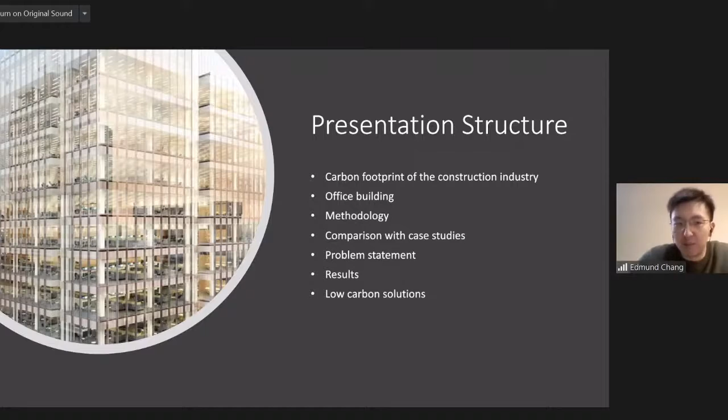As a summary, I'm going to share about the carbon footprint of the construction industry globally, in Scotland, and in the UK. I'll also explain my methodology, but not too in depth. I'll compare my results with other case studies and address the problem statement. Here's a solution I discovered in my project: by increasing the height of the building a little, we can save materials and reduce carbon footprint. But before telling you how I managed that, I'll give some insight into the current construction industry and how it affects the climate.

In Scotland alone, current measures to mitigate climate change include sourcing nationally made materials whenever possible, or even better, locally made materials. Production of steel using renewable energy and using cement substitutes are also essential, because cement production generates tons of carbon dioxide. There have also been talks to design buildings to last 100 years instead of the typical 60, which reduces the need to build. If we build nothing, there won't be any new construction adding to the carbon budget.

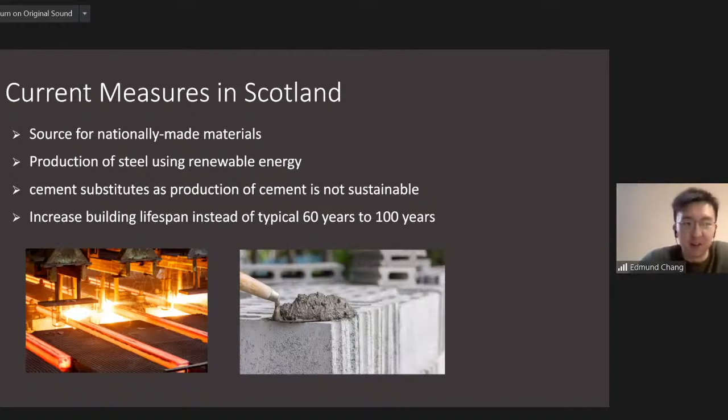In the UK alone, the construction industry is the single largest contributor of CO2, at 49% of total carbon emissions. There is urgency in decarbonization to limit the increase of global warming to only 1.5 degrees Celsius after 2050. If we do not enforce strict carbon laws, the world's average temperature is projected to soar to more than 3 degrees Celsius by 2100.

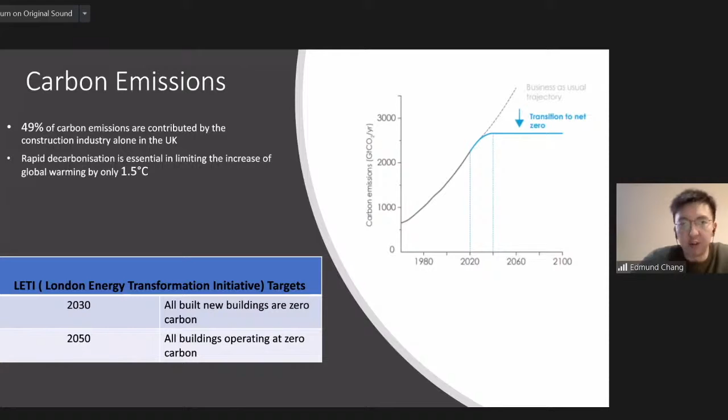The world is expected to build more than 230 billion square meters of new construction by 2040, equivalent to adding a city the size of Paris every week to the planet until 2050. Globally, the construction industry generates 38% of carbon footprint every year, but current trends imply it will still increase if countries continue to ignore strict warnings. To make matters worse, most countries still do not have carbon regulations, especially developing countries.

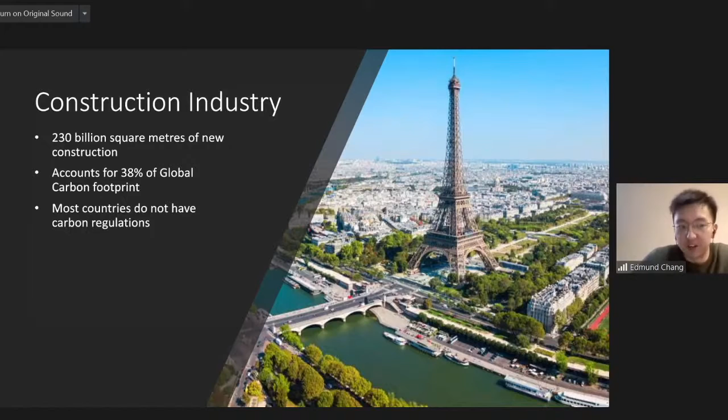The UK has set a target of achieving net zero by 2050, and Scotland has pledged to achieve it faster than the rest of the UK. The 2020 target was a near miss, but it was achieved thanks to COVID-19, ironically because construction industries were put on a stop.

There are currently 2.45 million homes in Scotland and more than 200,000 non-domestic buildings. Around 30% of homes and buildings still need retrofitting to meet climate change targets, but despite efforts to retrofit, we are still not meeting the targets fast enough.

The UK alone has a 5-year carbon target that must be achieved in every 5-year interval so we can reach net zero by 2050, five years later than the target set for Scotland. However, similarly to Scotland, the UK's current reduction levels are not fast enough, and we are not on track to achieving net zero.

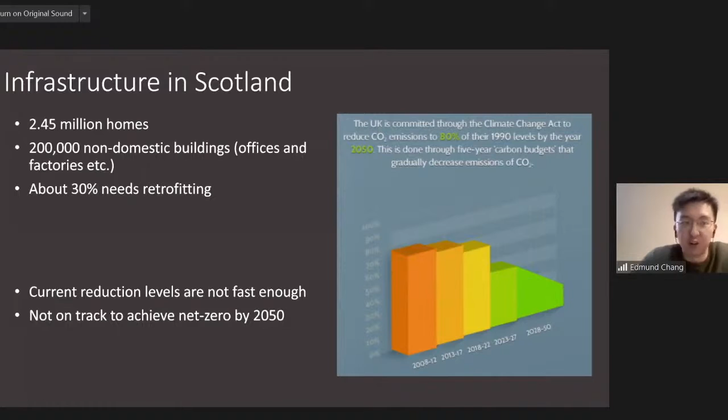That's enough background on the construction industry. Now I'll introduce how civil engineers measure carbon footprint. In a building, its carbon footprint can be split into two major components: operational carbon and embodied carbon. Operational carbon associates with power and heat to operate the building, and embodied carbon covers material extraction, manufacturing, and construction.

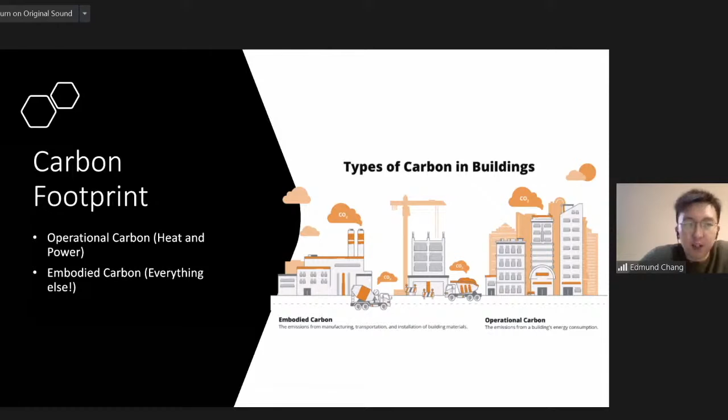Embodied carbon is the main focus for engineers currently because energy efficient buildings are on the rise. Buildings are transitioning to renewable energy, and operational carbon emission will be negligible in the future. Embodied carbon, as a result, will comprise the entire life carbon of a building. So imagine a building with 100% clean energy: the yellow portion in this diagram will be non-existent, meaning embodied carbon will occupy the whole life carbon of a building. So it's very crucial that we look into reducing embodied carbon.

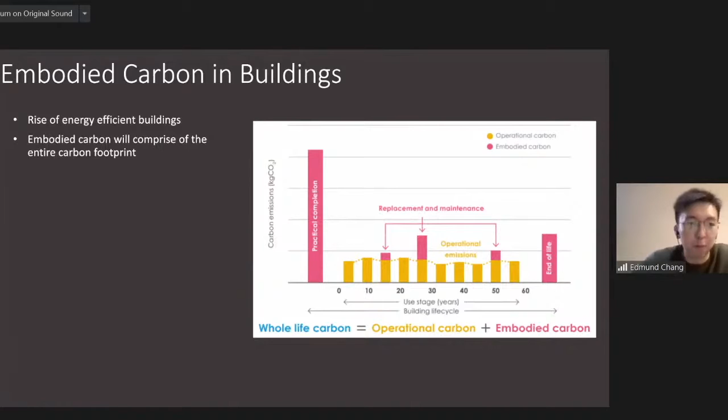So what did I do for my project? I looked into an office building currently under construction and tried to find a way to reduce embodied carbon for the structure of the building. For confidential reasons, I can't disclose the actual location, but you can sort of guess where this is. What I can reveal is that this building has 13 floors, a rooftop running track, and glass and aluminum facade.

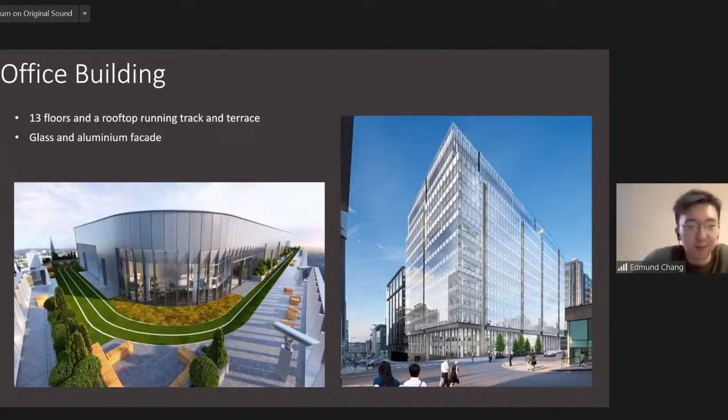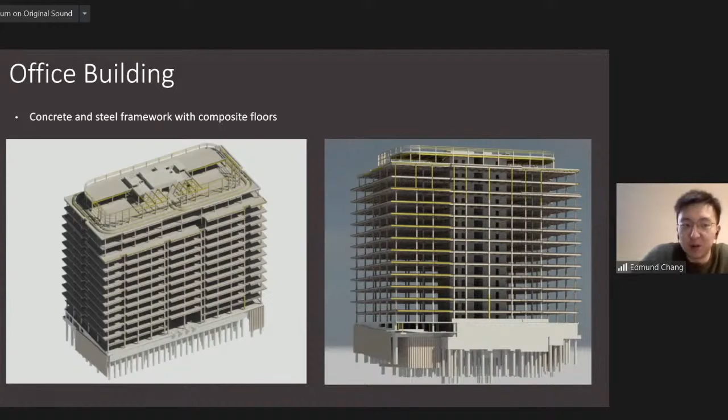This here is the structure model of the office building, created using a computer software. The frame of the building is mainly steel, and it has about 3,500 tons of steel.

My methodology for this project can be summarized in these steps. First, I exported all the materials used to create the building from the computer software into Excel spreadsheets. Then I calculated the embodied carbon of the entire project in those spreadsheets. After that, to reduce embodied carbon, I changed some parameters in the structure of the building, did trial and error in more computer software, and recalculated the embodied carbon. There are lots of numbers in my spreadsheets, so I'm not going to show you, but if you're interested, you can email me later.

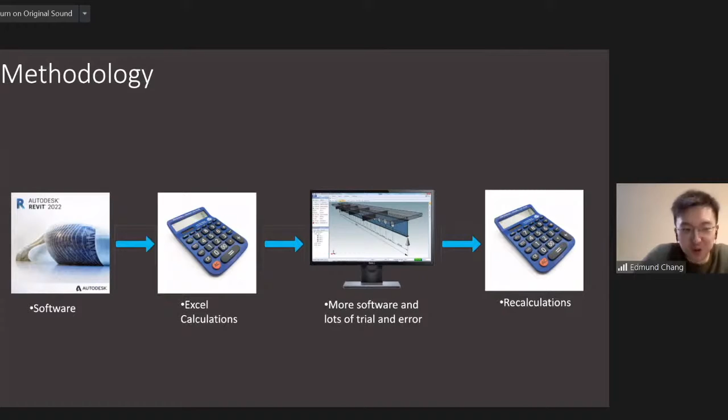So for my calculations, the steel frame of the building contributes the most embodied carbon, which is the orange pie shown here. Therefore, I'm going to focus on bringing down the embodied carbon in the structural frame of the building.

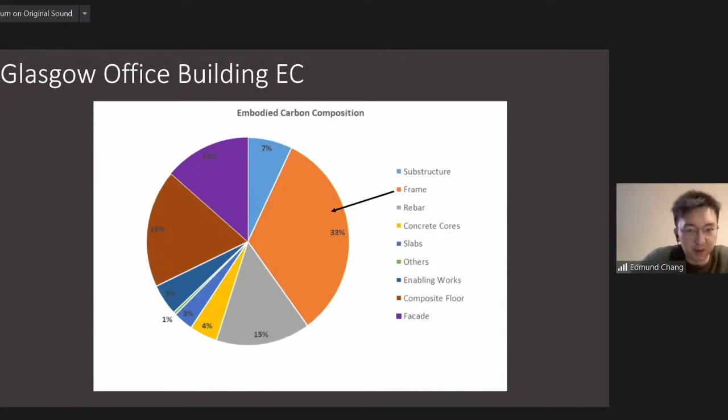The key findings for my calculations showed that the building generates about 19,000 tons of CO2 equivalent and about 580 kg of CO2 equivalent per meter squared. Approximately 3,500 tons of steel is required to construct the building.

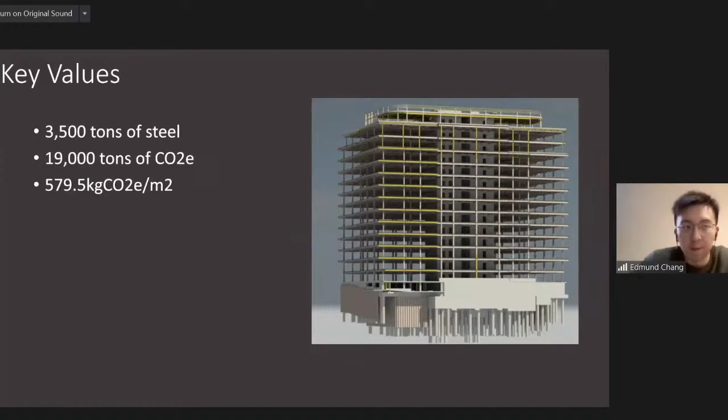This table shows the comparison of my building against 15 other recently built buildings in the UK. As you can see, the Glasgow office building sits below the average embodied carbon of these 15 other office buildings. The Glasgow office building is 173 kg of CO2 equivalent per meter square, lower than the average value of 753.

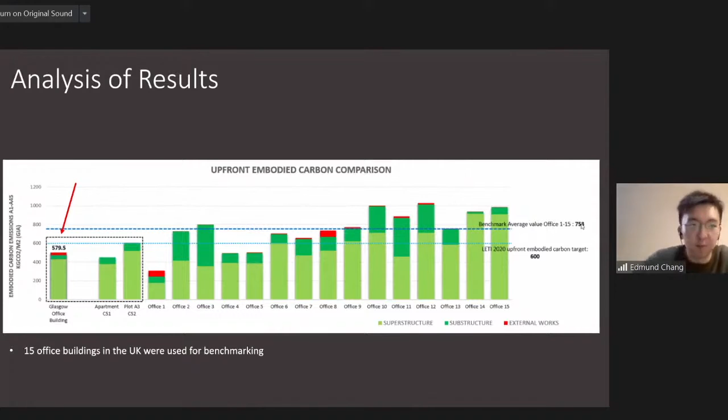And I mentioned at the start that increasing the height leads to reducing carbon footprint, and I'm going to explain how. Currently, the Glasgow office building is capped at 60 meters. Part of the reason is due to saving cost and fire safety, but this is not the main issue as to why this building is limited to 60 meters.

But let me address how increasing the height will lead to savings in materials and ultimately reduce embodied carbon. By removing the height restrictions, engineers can use a deeper beam...

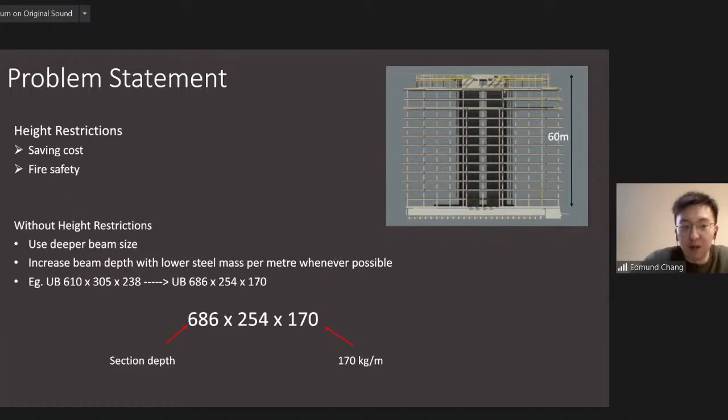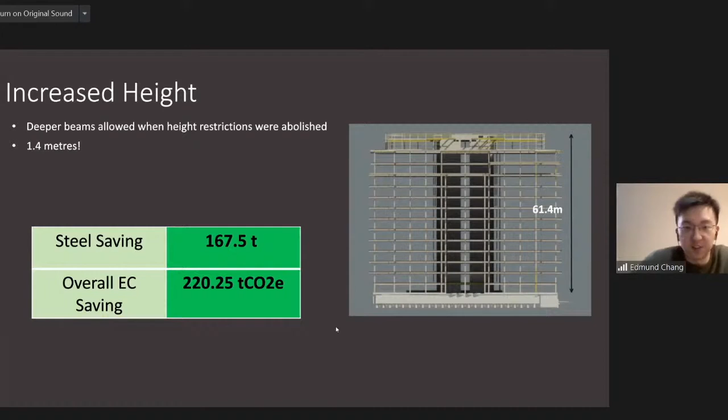So after switching to taller beams, the building will increase by 1.4 meters and will be standing at 61.4 meters high. As a result, as the taller beams are lighter, there is a huge saving of 167.5 tons of steel and an overall reduction of 220 tons of CO2 equivalent. As for the embodied carbon per meter square, it will reduce by 7.5 kg of CO2 equivalent per meter square.

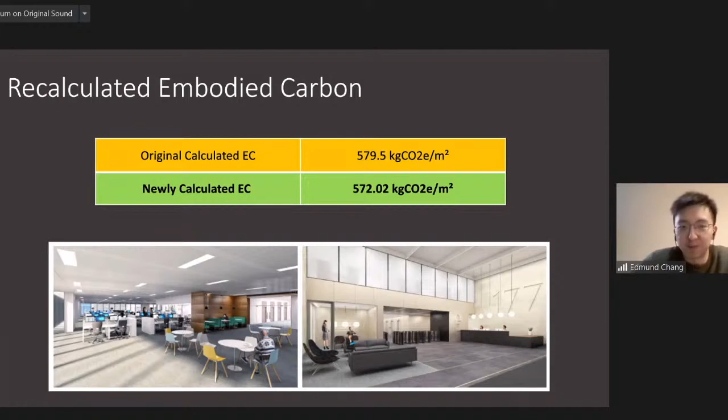The 167 tons of steel saved can instead be used for the production of 185 cars. And for the embodied carbon, it is similar to 223 return trips for one person from London to New York - unless you are taking a private jet, then it will be very much higher.

So I've covered enough numbers for the rest of the day, so I'm going to tell you the main reason why the building was restricted to 60 meters.

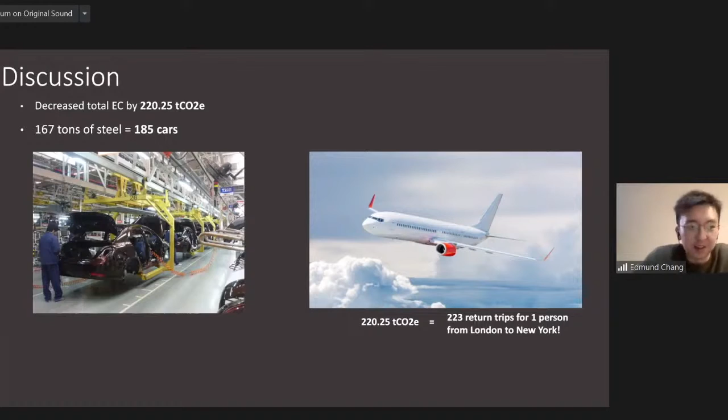This is because the Glasgow City Council does not want tall buildings to ruin the historical city skyline that Glasgow is associated with. They are worried that some of the historical buildings and structures will not be visible on the Glasgow skyline, as these tall buildings will be the only ones visible from afar. This is a similar reason in Europe, and this is why we don't see lots of skyscrapers in Europe, unlike the US and Asia.

This also contributes to the underlying issue relating to history versus climate change. People are concerned that retrofitting such old and listed historical buildings might suffer damage to their quality and character. As a result, people are calling for the government to allow such historical buildings to be exempted from retrofitting to meet climate change targets.

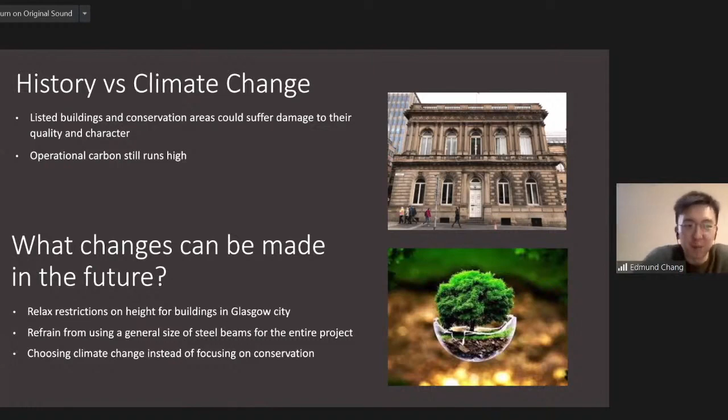So I'm quite curious which option most of you would pick - preserving a piece of history and culture, or mitigating climate change?

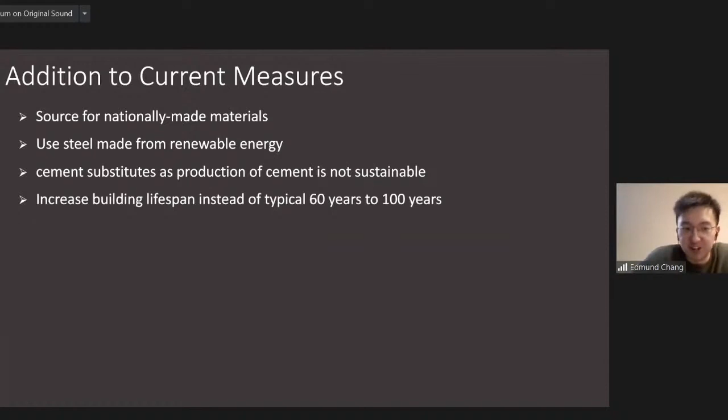As a conclusion, I have found a possible solution to add on to current measures, which is by relaxing the height restrictions - at least in Glasgow City, we can save materials and ultimately reduce embodied carbon.

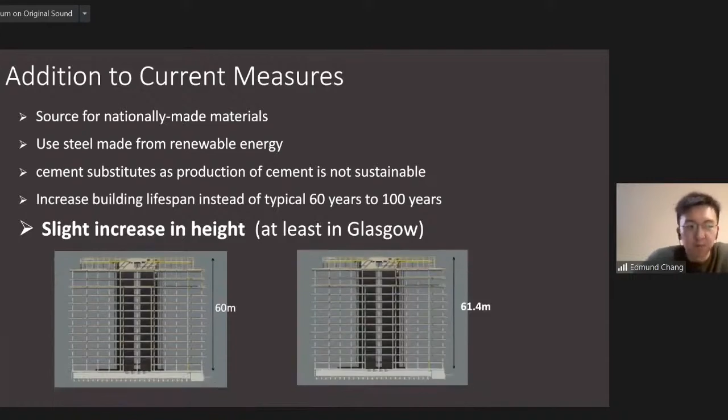Therefore, what future measures can the construction industry do? Well, as a start, engineers should not be over-designing structures so that more materials could be saved. All materials would also need to be recyclable, from the steel beams down to the bolts, so we are not creating more materials. Perhaps in a few years' time, engineers might discover a way to sequester carbon into the concrete or other green construction technology.

But as a start, Scotland should start looking into focusing more on climate change instead of preserving too much of its historical buildings. This may sound very controversial, but you can let me know what you guys think in the comments - would you preserve a piece of history, or would you put effort into mitigating climate change?